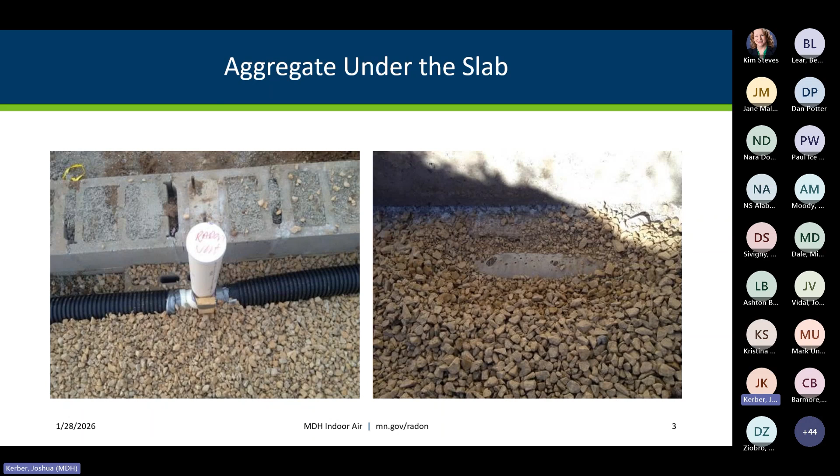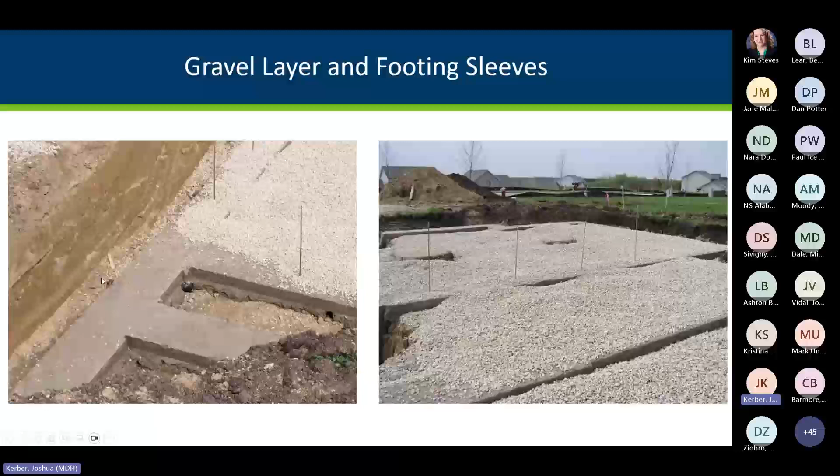You also want to make sure the air void you're creating under the slab is continuous from one foundation zone to the next. So if you're drawing air from anywhere, you make the connection from point A to point B. One way we do it here in Minnesota is with footing sleeves—4-inch perforated PVC pipe that connects this foundation zone with the next. Likewise, we have one connecting the outside foundation zone with the inside foundation zone.

On top of that clean gravel fill, we put a vent pipe and a soil gas retarder. It's probably a misnomer calling it a soil gas retarder, because there aren't really strong requirements in the standard, or field experience showing it needs to be airtight. So it's not really keeping soil gas from moving into the building. What it's doing is a much more important role: keeping the concrete slab pour above our clean gravel fill. It's really a concrete retarder if you want the nuts and bolts of it, and what it does is keep the concrete from filling our gravel bed.

That does two things for us. One, it gives us the soil gas collection plenum beneath the slab. Two, it creates drier environments because we have a capillary break—so the wet soil underneath the house doesn't have that wetness migrate through the concrete and into the house.

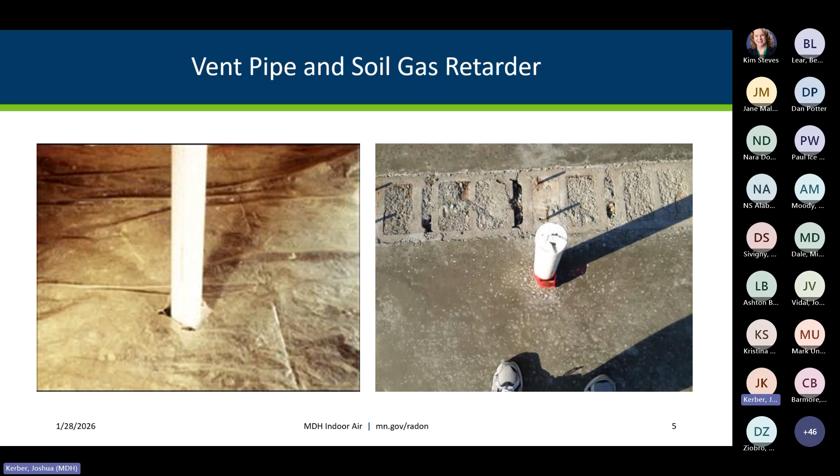Crawl space membranes do need to be sealed to the outside walls and inside piers, but we don't see a whole lot of them in Minnesota. Other states, obviously, you'd see these quite often. The reason we don't see many crawl spaces here is because we have to dig so deep to get below the frost line that we just hollow it out and call it a basement.

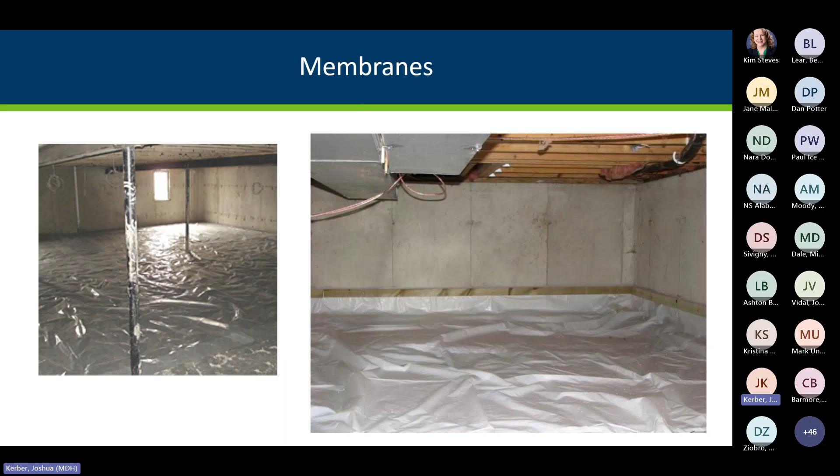Now, the most important piece to all of this, if you want a successful radon system, is to make sure the gaps and cracks are sealed. This is an example of a sealed floor-wall joint between the floor and the concrete block walls. If this joint isn't sealed in a permanent, airtight fashion, and then we finish the basement and bury this crack behind a wall, it's going to cost a heck of a lot more energy to reduce the radon in this building.

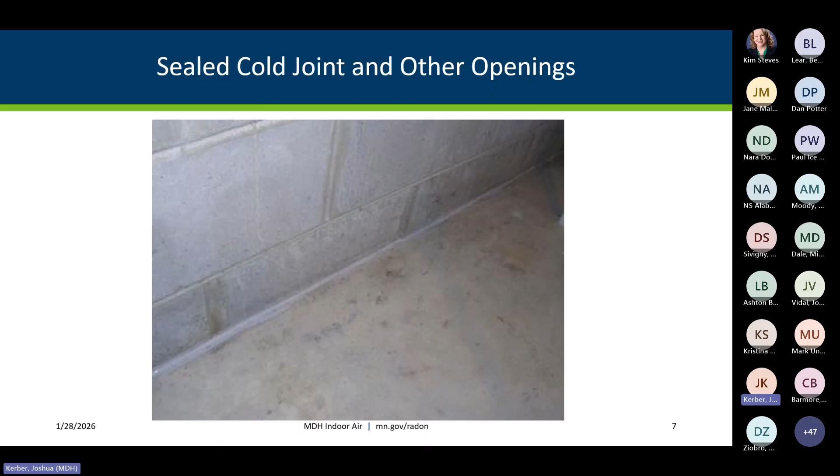So if there's one thing you take away from our presentation today, in new construction and in retrofit mitigation for that matter, the sealing is the most important piece. The floor-wall joints are most important, but other openings too, like control joints and expansion joints, all need to be sealed to make sure we keep the conditioned air in the basement.

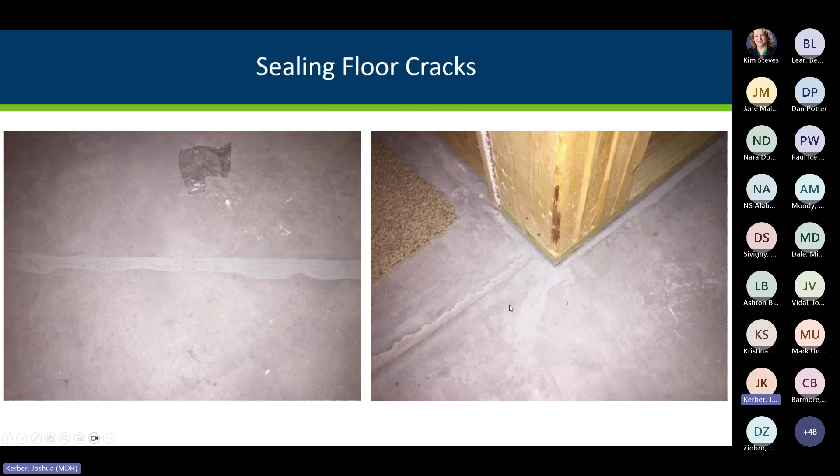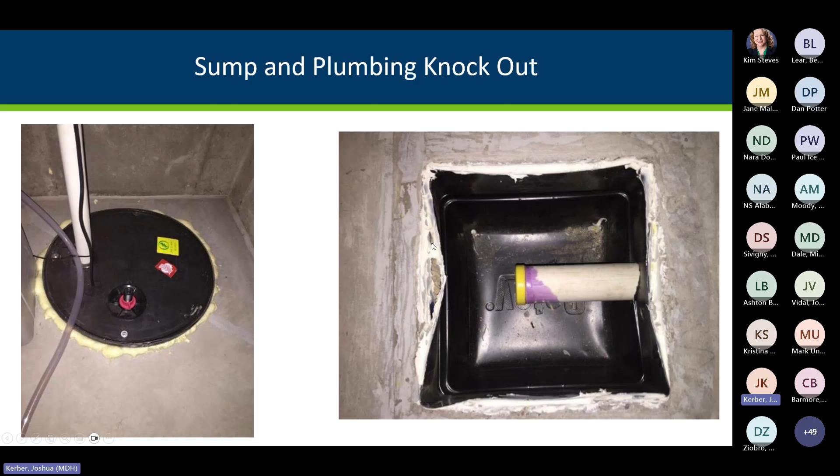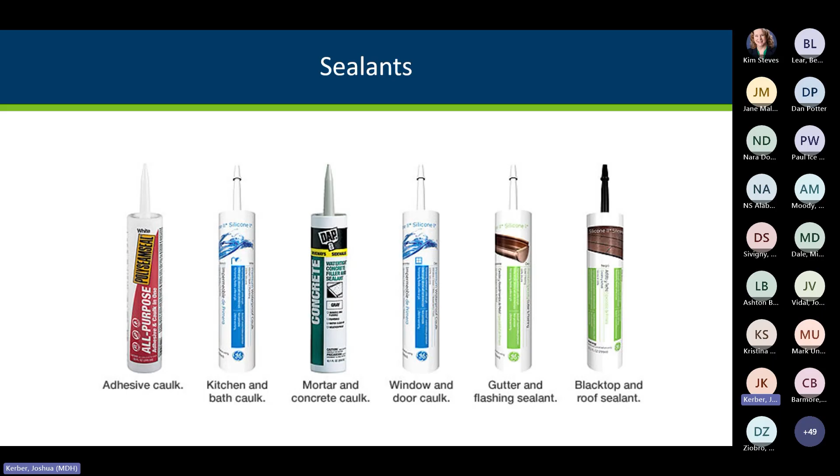Other penetrations through the slab also need to be sealed, using proper materials. This plumbing knockout already pulled away from insufficient sealing, so better materials lead to better results. You want to use sealants, not adhesives. Adhesive caulking isn't what you want. You want an actual concrete sealant that will move and flex as the two materials shift. Adhesive is meant to stick forever, not move. Sealants will move as the floor and walls crack open or shift.

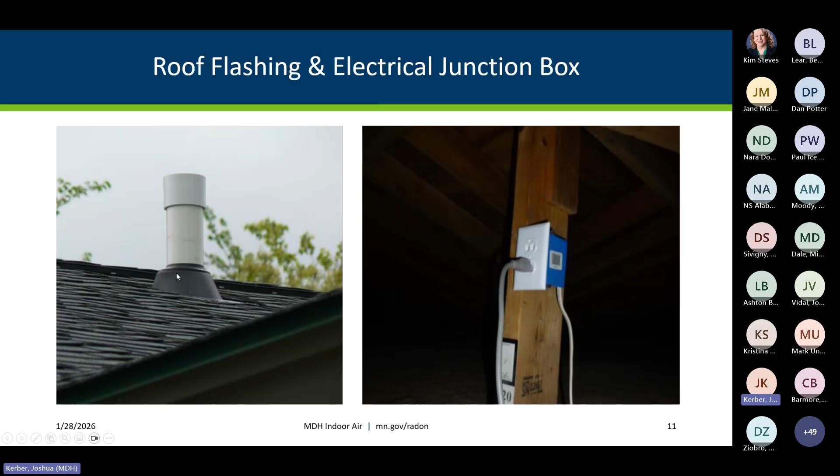Then above, we've simply got roof flashing. The pipe is flashed above the roof, and then we have the electrical in the attic.

So what's next? We simply add the fan during construction, which is probably the best way to do it, or test for radon after occupancy and then activate the system if necessary. I'm going to pause there and pass it over to our EPA colleague who has joined us.

Tommy, if you want to take it. Thank you, Josh. Sorry everyone for the technical difficulties, but here we are.

EPA estimates there are over 7 million existing homes in the U.S. that still need mitigation today. Building homes with radon-resistant features is one of the easiest, most effective ways to protect more people from radon exposure.

Recently we published a benefit cost analysis, and we estimate that new construction strategies, applied to a sample of 2 million homes over 20 years in high radon areas, can avoid an estimated 19,000 to over 48,000 excess lung cancer deaths, with a net present value between $62 billion and $131 billion. This is an estimated return.

If you want to put it per dollar, it's between $25 and $53 per dollar expended on radon reduction strategies.

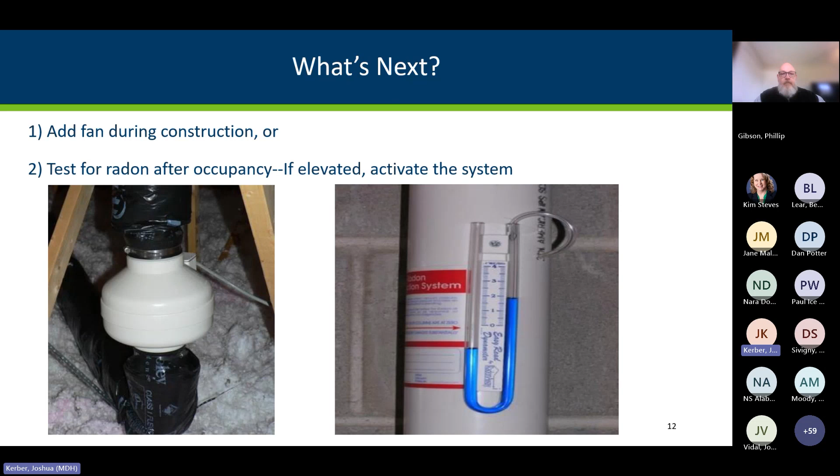One strategy we had was: why activate passive systems during construction? Everything is cheaper when done upfront at the point of construction, so you'll have much lower radon levels to begin with. You'll also address a false sense of security among occupants — when they see a passive radon system, they think they're safe, which isn't necessarily the case since we haven't tested to determine that. There's also decreased liability for builders, and it's more cost effective to install the fan upfront rather than later. The problem is the additional cost over the entire population if we activate these systems from the start.

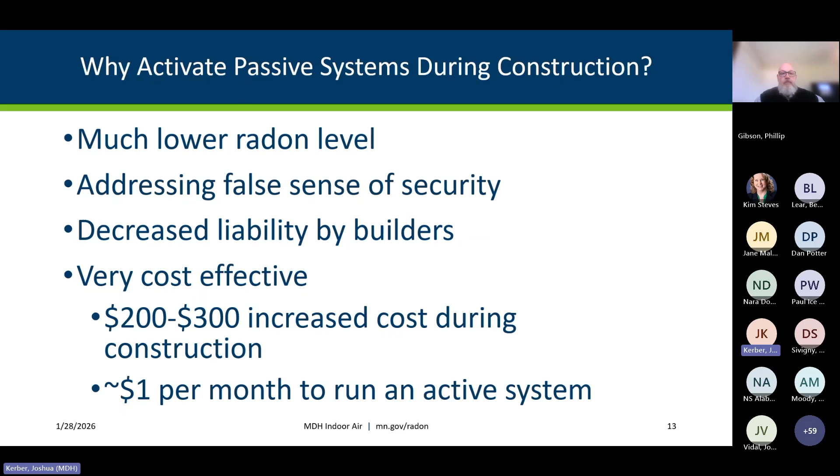In 2015, the Minnesota Department of Health conducted a radon-resistant new construction study with our new home population. We sent surveys to the 13 fastest and biggest growing counties in our state, roughly 4 to 5 years after the inception of our radon-resistant new construction building codes. We wanted to get a sense of how these systems were performing as built by a variety of different builders in different locations. We did not visit these houses upfront; we provided radon test kits for homeowners to do their own testing and gathered the results in follow-up. As of publication, we tested over 800 homes, and only about 20% were elevated. Compared to our existing data set of hundreds of thousands of homes prior to the building code, we saw about 40% of existing homes over 4. So something we've done in building code has greatly affected radon in new homes — our average radon was about 2, versus about 3 in the larger existing data set.

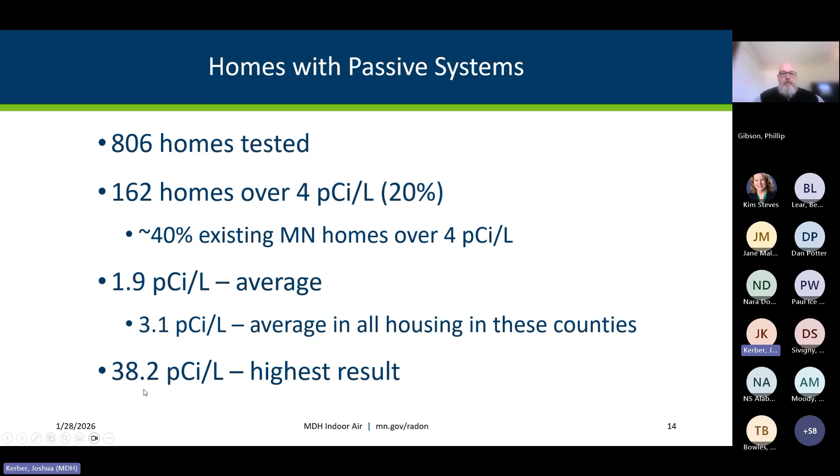But we still had elevated radon in some houses because attention wasn't paid to construction detail. Fans were added by the homeowner and then retested. The carrot and the stick here was: we'll give you a free radon test kit, and if you're one of the first 100 people who respond with elevated radon, we'll provide a free radon fan. We provided over 100 fans, and at time of publication we tested 72 activated houses — 70 came back well under 4. There were 2 homes still struggling, however. We visited those 2 homes and found that the sealing detail I mentioned earlier was ignored. Once that was taken care of, radon went down dramatically — over a 94% radon reduction in this subset. So we know that it works.

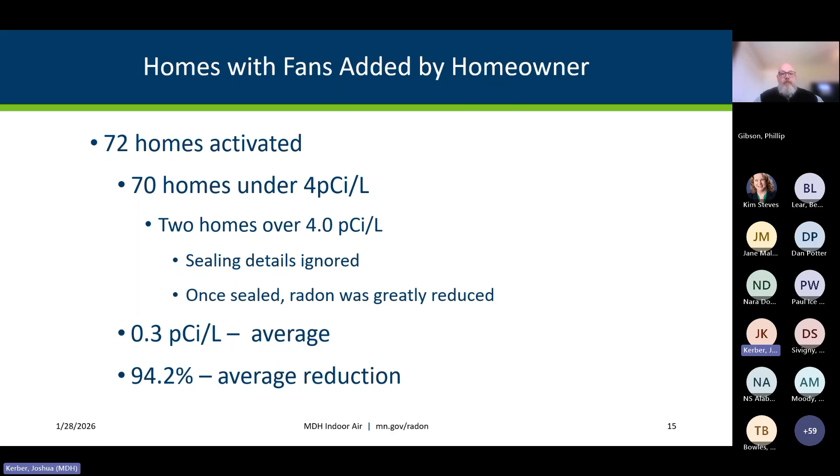So what do building code officials need to know? First, in areas looking for code adoption, we may not want code officials to take on more responsibility — let the radon professionals handle that, let the people who know radon handle it. But there are common mistakes made by builders. The overlooked detail is the sealing at cracks and joints not being done. If you can get that slab and wall sealed, that's the most important piece.

In some cases, we don't have enough room in the attic for a radon fan, because the existing PVC pipe is located too close to the edge of the roof to have space to work. So we now require in Minnesota — and we've changed the codes, which Jane will talk about — an actual working space where you can put the fan in. Other failures, not as common but they do happen, include the suction pit or T-pipe under the floor getting plugged by debris, garbage, or even concrete.

So it's not actually connected to the gas permeable layer. And finally, we have little or no radon testing being conducted. We don't have a good data set of post-testing, specifically nationally. And that's a false sense of security for the owner and the occupant.

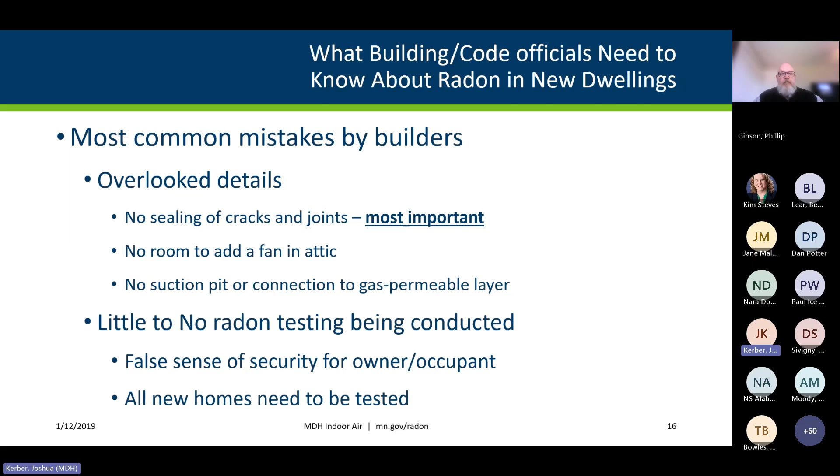So all new homes need to be tested. And we have addressed that in the national code that Jane is going to talk about now.

Perfect. Thank you. Okay, well first of all, I want to say I'm really glad to be here today to participate in this exciting launch of a new effort where government to government communication, meaning state radon program staff, will begin to, or continue rather, in an organized way, hopefully we'll see more and more contact with code officials from radon programs.

You all, state radon program folks, are, as government employees, really key ambassadors for this message, because at the end of the day, the code officials have a lot of power in this system, and are going to rely on your input, your opinions.

The family of codes managed by International Code Council are all updated every 3 years. ICC manages the committees and the hearings. The final decision on all actions on the codes is made by voting ICC members, the code officials. And I would say that the open participation and stakeholder balance in their process is limited. They don't have a full array of stakeholders participating in their committees, for example, and those are just different aspects of how they run that system, that differ from, for example, the ANSI-led standards process used for the RRNC standards.

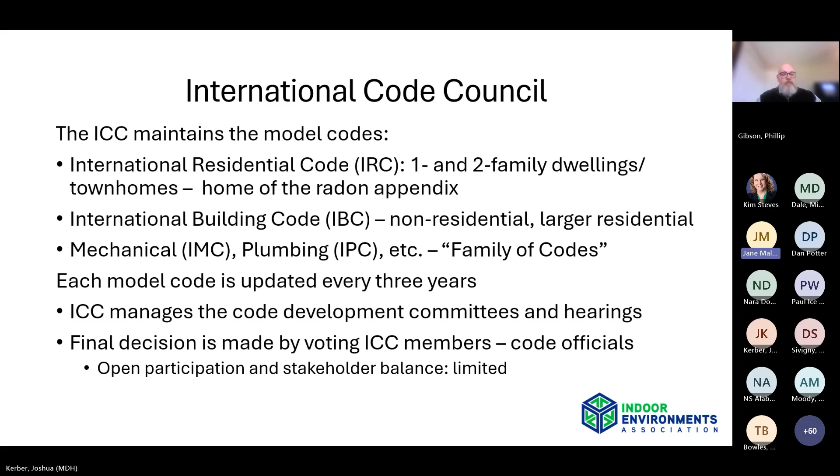With the International Code Council Appendix F, all code appendices are optional, and a proactive jurisdiction decision is needed to actually make an appendix available locally. Now, there's some exceptions to that, but generally speaking, our conversation about code adoption, the appendix adoption, is about getting a local or state agency or legislature to actually move that forward.

Appendix F is called radon control methods. And this is one thing I wanted to stress today. We in the radon community refer to RRNC, radon reducing new construction, or radon resistant new construction, RRNC. That terminology is not used in the code world. I mean, some people who are knowledgeable about radon have heard that term, but the name of the appendix is radon control methods. And so in the process of trying to educate code officials and other partners to advance adoptions, it's important to use that term, radon control methods.

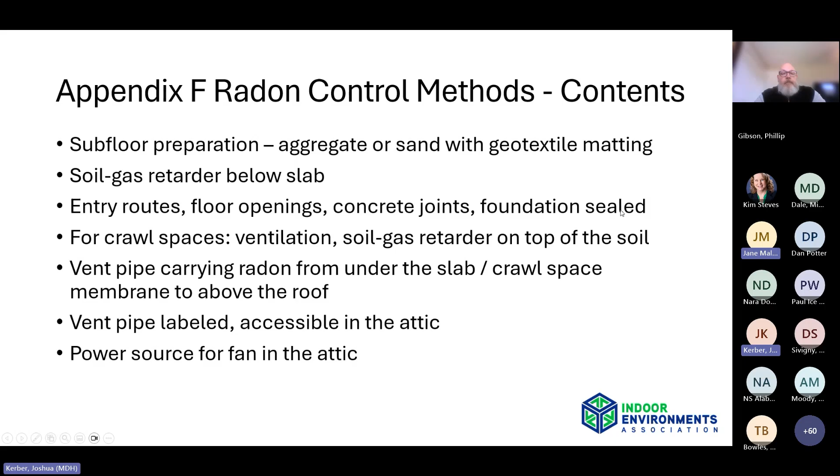And as Josh said, these protocols from standards to... you know what, I'm going to stop here, Josh. Why don't you put up my slides, and that way, because we're going to get to the maps in a minute. Thank you. I've got them up. Okay, I've got them up. I'm trying to follow you.

Okay, so the evolution of the Appendix F, you can see on the slide there. I won't read all that detail, but just to let you know that in the beginning, it was developed by code officials, EPA, and builders. It was unchanged until 2021 when the testing requirement was added.

A minor change in 2024 code allowed for an option for certain soils. There were 4 changes in 2020 that are going to take effect in the 2028 code.

First of all, to delete the radon zone map and the county list. Secondly, to allow an option to follow the ANSI RRNC standard, rather than the detailed protocol in the appendix. And also adding the cylindrical space in the attic to allow room for the fan. And finally, adding a requirement for horizontal pipe inserted on both sides of the T-fitting under the slab or in the crawl space.

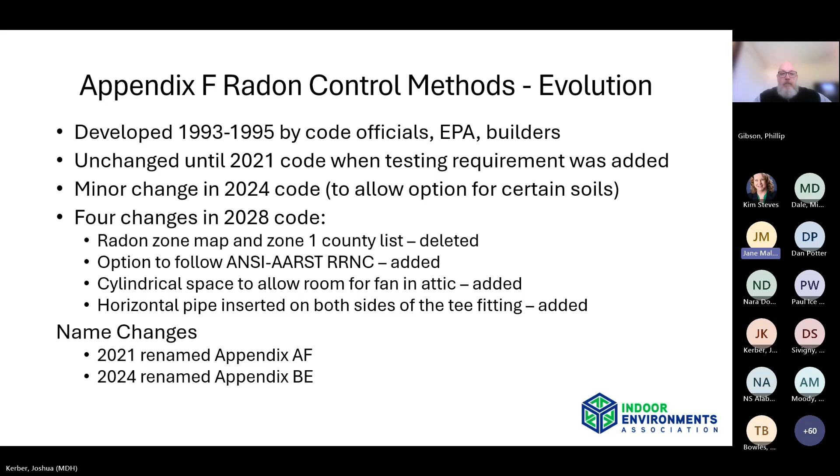In addition, the appendix has gone through name changes. They changed it to Appendix AF as of the 2021 code, and they changed it to Appendix BE in the 2024 code. So that makes the conversation a little complicated because it's not one size fits all, depending on what code is already in action in a given jurisdiction.

State legislature, there are 4 ways that states and localities can adopt. The pathway will vary. First of all, state legislature enacts model code as law. For example, 3 states created a mandate to develop the policy using a task force or another mechanism.

Another way is for the legislation to empower state level appointed bodies or councils. And this is common. A number of states have some kind of building code administration body or building code council, but it's an appointive body made up mostly of code officials and builders.

Localities are authorized to adopt codes by state legislation. Some can vary from the state version, some may only adopt the state version. They're basically having a preemption under something called the Dillon rule, which does not allow localities to have something more protective or even different from the state. In some states, localities are free to adopt without any approval whatsoever.

So then the statewide radon appendix adoption considerations: legislation may be needed, and we all know that U.S. state staff can't be involved in that directly, but you'll be invited to contribute information and opinions when appropriate. A legislative appointed body may have the power to decide, like the board or councils I mentioned. But keep in mind that state employees may influence the decision making. State staff may have the power without a board.

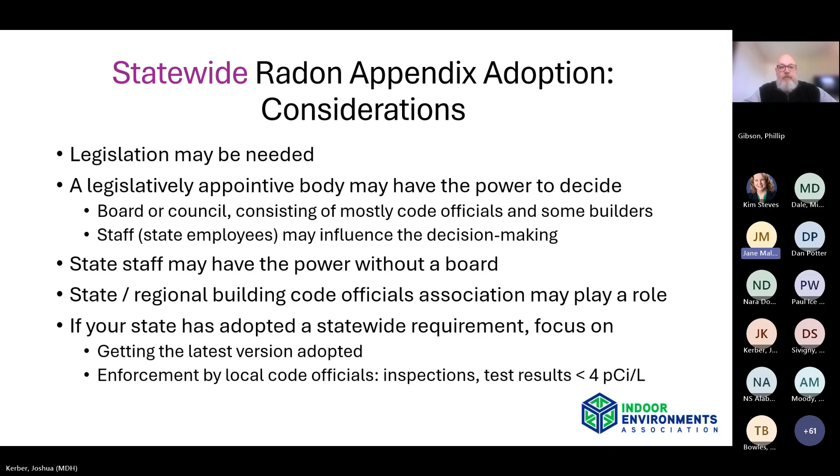The next slide is going to focus on local radon appendix adoption, but I'm going to skip over this—it's sort of the same formula. There are different things you will do at the local level. Again, the code officials are extremely influential.

What I want to focus on now is the recent changes in the appendix, because these are news for all of us and also for the code officials. Many of you know already that the 2021 code added a testing requirement, and this slide details how that works.

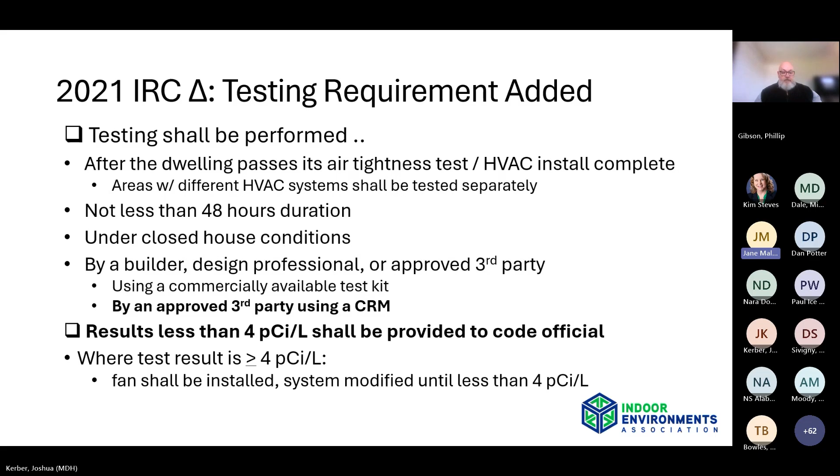The first half is about when and how testing shall be performed. The second part shows results less than 4 shall be provided to the code official. That's a very powerful tool. If the appendix is in play in a jurisdiction that has adopted 2021 or newer, having that test result less than 4 is a very powerful tool to make sure these systems are working after they're built. Of course, having an independent test is important, better than having the builder conduct the test. And if the test is above or equal to 4, then they must go back and install the fan or otherwise modify the system.

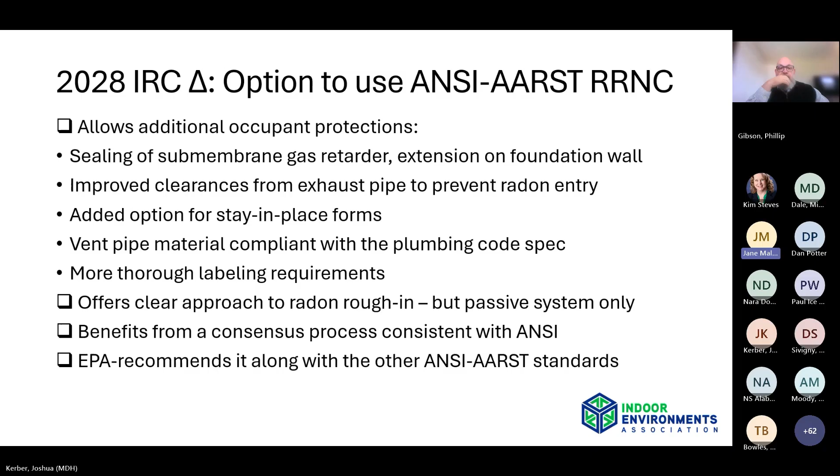Next slide: also the option to use ANSI RRNC. As Josh said, these protocols are fairly different—I mean, mostly the same, but there are a few differences. One advantage of promoting an ANSI standard to builders is you've got the benefits of it being developed through a consensus process consistent with ANSI. Also note that EPA recommends this along with the other ANSI standards. But there are some advantages.

Another change, again headed for the 2028 version of the codes, is deleting the radon map and list. This language steered code officials not to protect zones 2 and 3. EPA was the lead proponent in removing it, because an appendix should advise how to do something, not where or where not to do it. No other appendix is place-based.

Code officials are now free to adopt Appendix BE. Alternative data from CDC, available in the radon report card for each state, shows prevalence of radon test results above 4. So if you want to be advocating for this, you can.

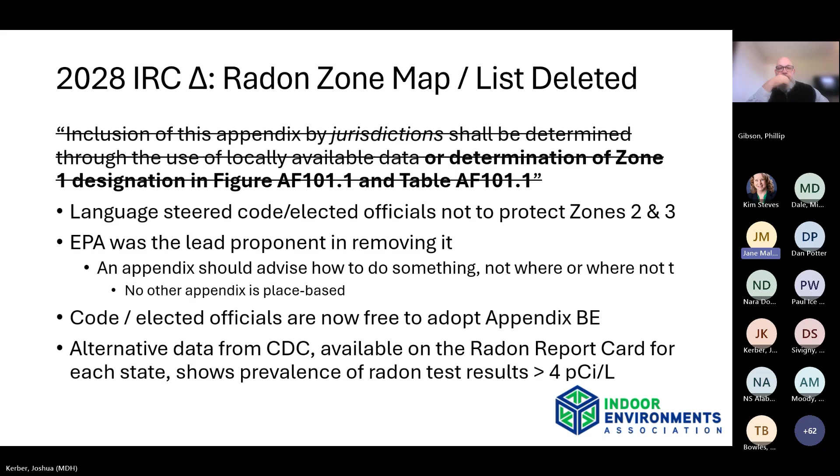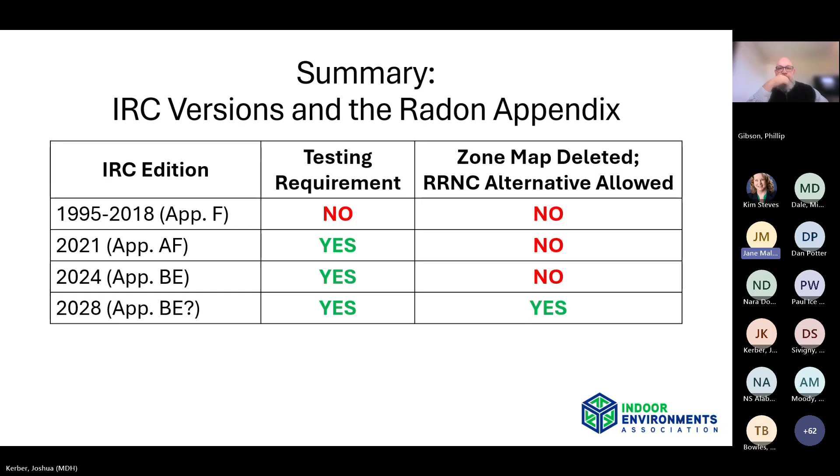The summary here shows the changes that have been made. You can see by edition in the first column, code edition of the IRC, which improvements are in play. I think this is a really important time for all of you to be looking at stepping up advocacy on the radon appendix, since these improvements have finally come to fruition.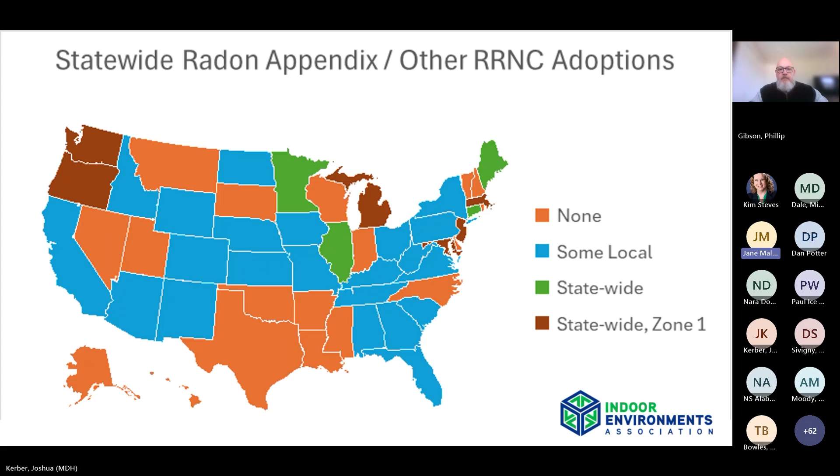I want to credit CRCPD leadership, Kim and Josh, for gathering this information. I think some others were involved too with the E25 committee to get new information on what we have in the way of adoptions. We hope those of you who look at this will check the toolkit and submit updated information about your state if we don't have the right information here.

Oh, no, right, so then this one highlights the states that have policy adoptions again, but it's highlighting those that have adopted AF or BE, because those are the states where the testing requirement is now in play. Those are the green, sorry, I've got several shades of green here. This map needs improvement, so we'll skip past that.

Thank you, and one more thing, tribal resources on codes. We don't have good collected information yet on tribal adoptions of codes, but I wanted to note that the EPA has had this resource on its website for a while, and it's a way forward for tribes looking at where they want to put building codes in play. This link and links to almost everything else you've seen in these slides are available on the toolkit that Josh is going to talk about later.

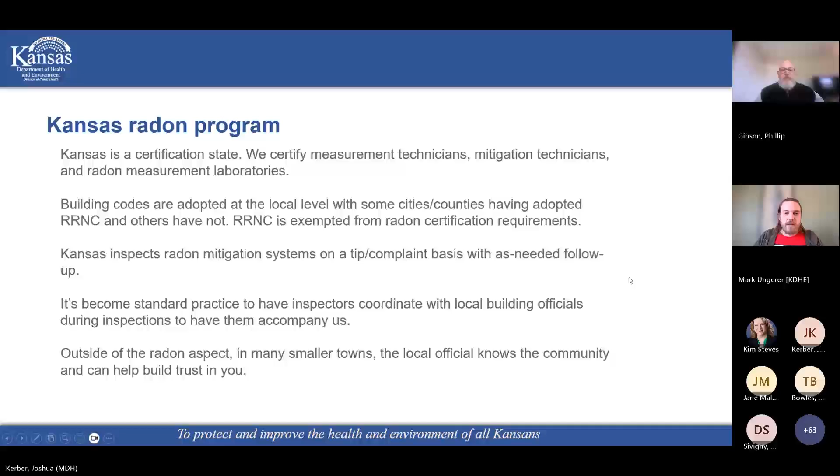One of the things, we have a lot more success where RRNC is adopted than in places it's not, unless there's a code official who has a specific interest in that, right? So we'll reach out to one or multiple contacts that we can find and tell them we're coming to do an inspection. And if they have RRNC adopted, it seems like they're more likely to come along, right? So we'll invite them and they'll actually accompany us on an inspection. So we'll go in and show them all the parts of the radon system.

And I like to do a good explanation of kind of what it is accomplishing in terms of that subslab depressurization, because building code officials, it's not like they're not intelligent, but they don't necessarily have all this knowledge about radon, right? Or what a radon mitigation system is doing. And they, like most of the general public I've found, commonly have the conception that, oh, it's just pulling radon out and discharging out. They don't understand that pressure field extension and that, the way that it's actually the depressurization that it's actually performing, right?

So just explaining those concepts and then kind of going over some of the issues that we see with passive systems, or that our builders come back or our technicians come back and say, hey, these are the issues I'm seeing, so I don't even want to touch them. And it helps a lot with education, helps a lot with them being able to kind of take that back to their group, or even builders that they know that are actively developing, and kind of liaison with them.

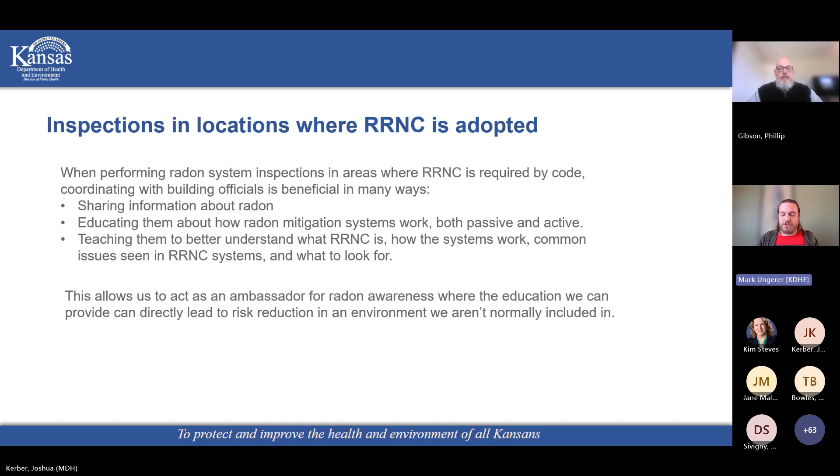And we did get a little bit of a delay in this during COVID, because while we did do some inspections, we typically were doing skeleton crew inspections, not a lot of people going in there.

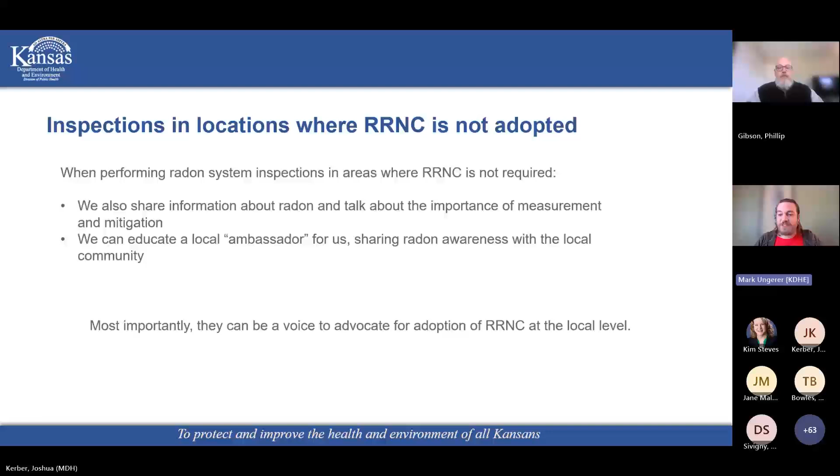So always check with your homeowners if this is something that you're going to start doing in the future. I'll have the inspection set up, and then I'll give them a call and say, hey, would you mind if I invited a local code official along, and kind of explain about RRNC. Sometimes the homeowner doesn't have any idea about building code and stuff like that as well. So it's a good idea to kind of get the permission of anyone involved. You don't want to show up with more people than they anticipated, or some sort of regulatory voice that is now in their home that they weren't expecting.

So those are some of the, I guess, best practices there. But I do recommend trying to find those code officials, even if you're not going to invite them out. If you know that they might be interested in going on an inspection, or even just educating them on what radon reduction systems typically are trying to achieve, or how they're trying to achieve it, I think that can go a long way into just helping with the success of the passive systems.

Are we holding for questions till the end here? I'm sorry. Yeah, we'll take them in the chat too. Okay, as well.

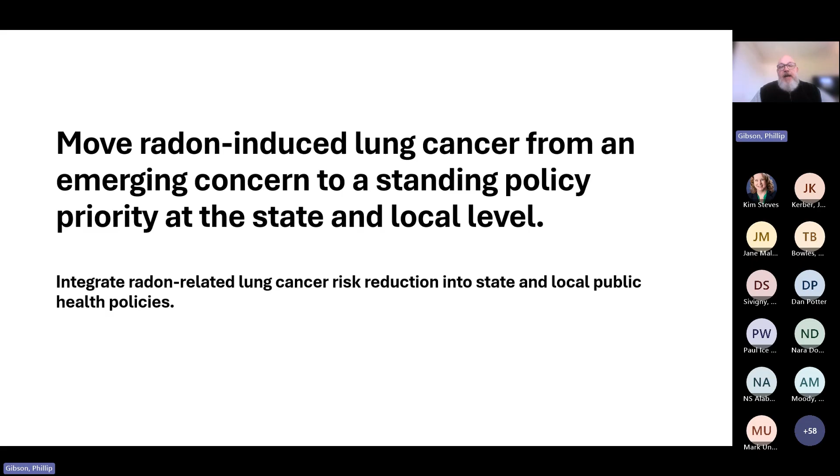So our goal then was to include radon mitigation standards, AARST, ANSI standards, into the North Carolina building codes, not to require mitigation to be conducted, but to guide mitigation systems as they were being installed.

Over the past 10 years, we've seen some meaningful success in terms of getting radon included into state policies. For example, the North Carolina Cancer Control Plan and the State Health Improvement Plan have included radon in the policies of the state.

In addition, the North Carolina Real Estate Commission recognizes, currently and since 2017, that a radon level of 4 picocuries per liter or more is a material fact. This means licensed real estate brokers can face disciplinary action for failing to disclose radon levels at or above that threshold. Testing is voluntary, not a requirement, but if a test has been conducted and the radon level is known to be elevated, everyone involved in a real estate transaction needs to be informed of that high level.

When it comes to building codes, it's important to understand that North Carolina is a Dillon's rule state, as Jane went over a moment ago, and is not regarded as a home rule state. This means local governments in North Carolina can only create building codes or ordinances when the North Carolina General Assembly allows it. The General Assembly does grant authority to the North Carolina Building Code Council to establish building codes, so our efforts were focused on requesting action from that council.

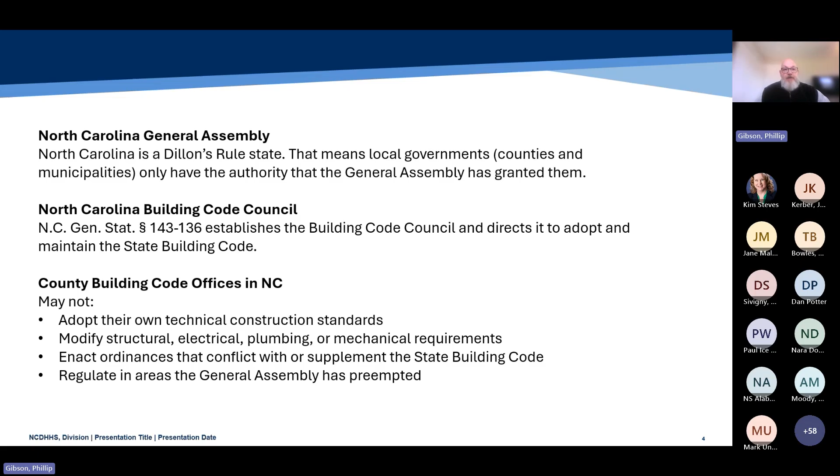Our overall approach has been and continues to be a long-term strategy — I'm playing the long game, if you will. This effort started 10 years ago with getting radon formally included in the Cancer Control Plan, as well as other policies. From there, we built partnerships, programs, and resources that involved those partners in the total process.

The Cancer Control Plan Advisory Committee includes a legislative subcommittee, and through that group we requested letters of support for including radon mitigation standards in the building code. Our request was for voluntary guidance — we wanted standards in the building codes so that, should a builder voluntarily decide to install a mitigation system in a home, there would be guidance in state policies for what that should contain. The guidance specifically referenced the ANSI standards. This was not a requirement to install mitigation systems.

So we made a formal request. This was an in-person presentation to the Building Code Council, and that request was denied.

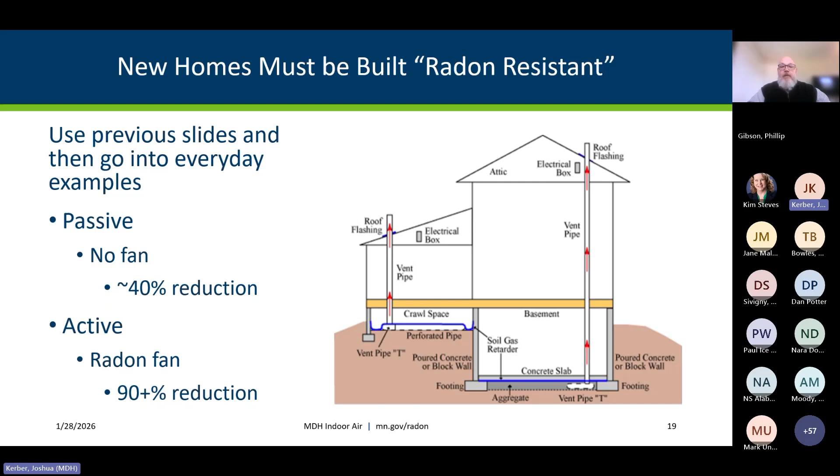These training materials are available to you folks as well, and they can be tailored. Everything I talked about earlier, we discuss at length, and then we actually bring them through a case study.

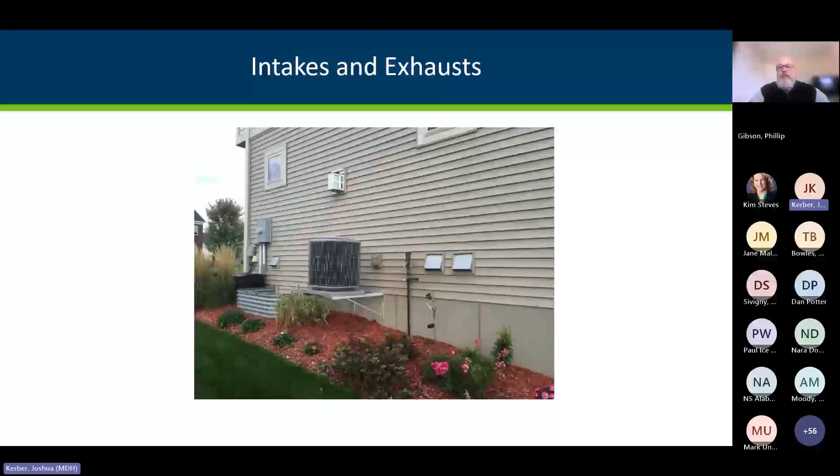This is a new modern-built home, built with radon-resistant features under the new energy code. We talk about the building science and the aspects of what you're actually inspecting—like, as a code official, do you understand there are intakes and exhausts and the importance of them working properly?

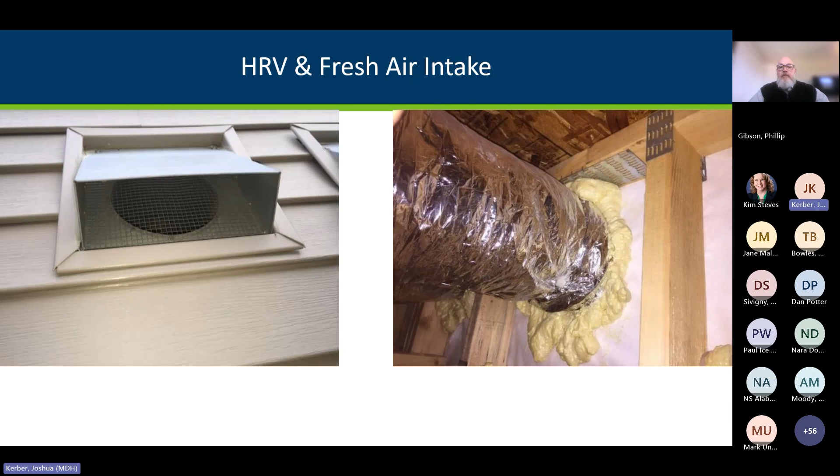On the left here you have a heat recovery ventilator, or an air-to-air exchanger. This is a very clean air intake, and they need to be clean. If they're not, that causes a problem with pressurization and depressurization, more specifically in the lower levels of the house.

We make sure we talk about fresh combustion air, whether or not the home needs it. As for combustion appliances, it does need it to breathe because these buildings run negative—another way to put that is these houses suck.

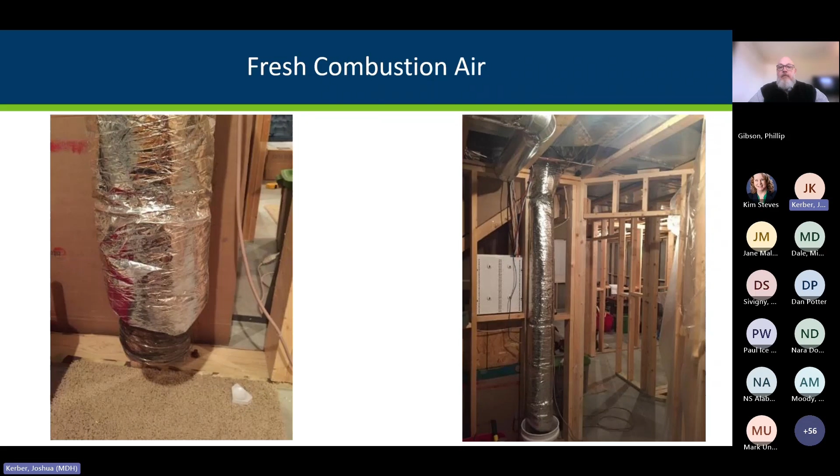You have an air exchanger, but what the heck is it? What does it do? Do the occupants know how to operate it, and more importantly, how to maintain it?

If you don't maintain these air-to-air exchangers, regardless of what climate you're in or where you're located, they will cause radon problems because they'll cause the building to suck in more air than they blow out. On the right-hand picture, which I'll zoom in on in a couple slides, this is the maintenance schedule for this appliance.

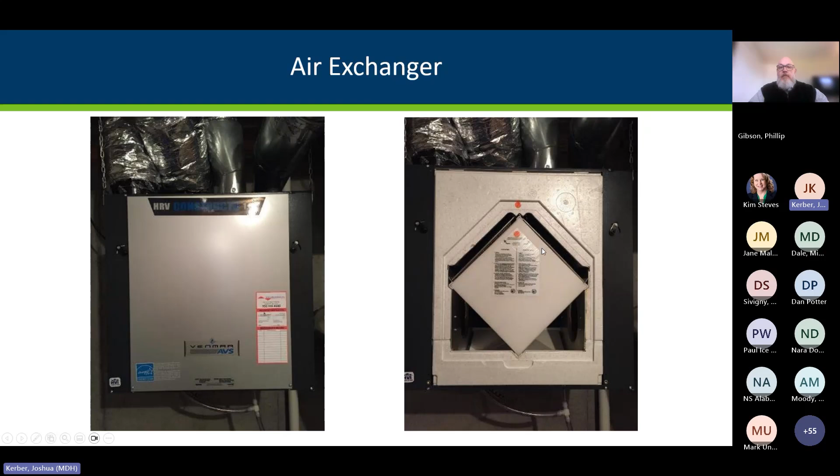It's rarely followed. It says these filters need to be cleaned or changed quarterly. Many of them, when we see inspections, haven't been changed at all in years.

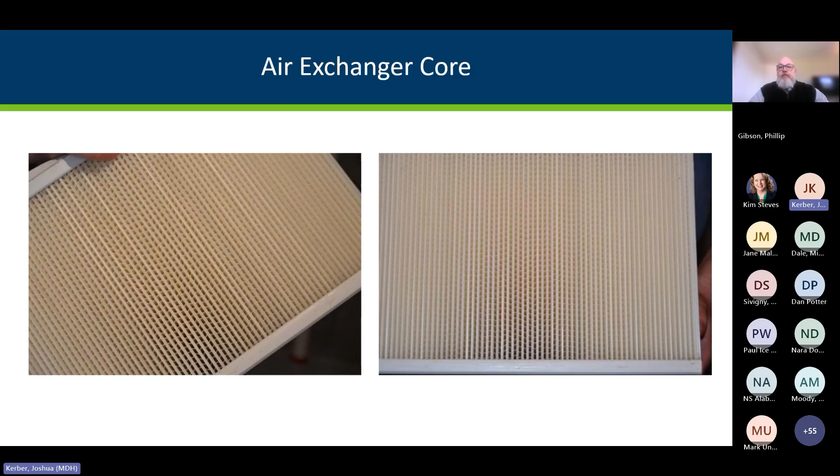There's a core, an energy-related transfer core. It doesn't mix the air in that box, but allows the energy—the heat and cooled air—to temper each other. This core needs to be cleaned at least annually, sometimes twice a year depending on the manufacturer. It's rarely done. Here's the maintenance schedule.

Change your filters quarterly, address the core annually, and clean the intake on the side of the building, which is probably the most important part of the entire air-to-air exchanger system. It says 'clean as necessary'—well, what is that? How are they going to know?

So making homeowners aware that they have to maintain this thing is of utmost importance. What I tell people in my training is: anytime you have to shovel your snow or mow your lawn, go double-check that your air intakes are clean.

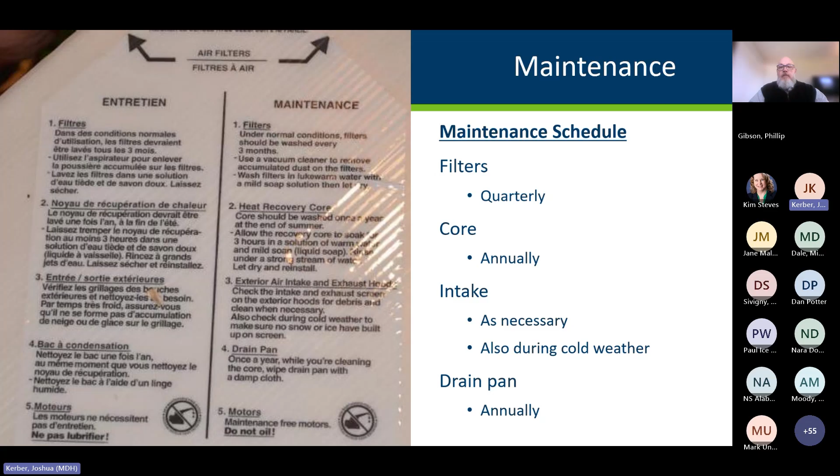A couple other things—the effects of an air exchanger. Does it affect radon levels?

Maybe sometimes, and it depends. If it's balanced or positively pressurized, you'll get a slight amount of dilution. But if it's unbalanced and unmaintained, it actually sends the basement into a harder suction scenario, and that can cause a radon problem in the building.

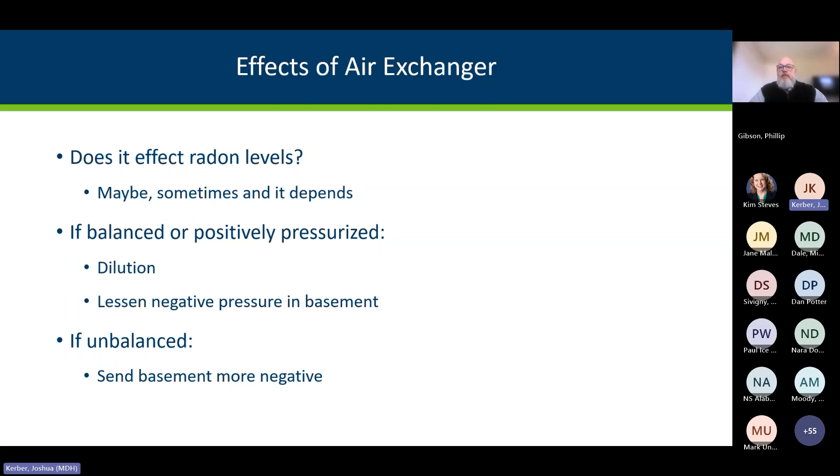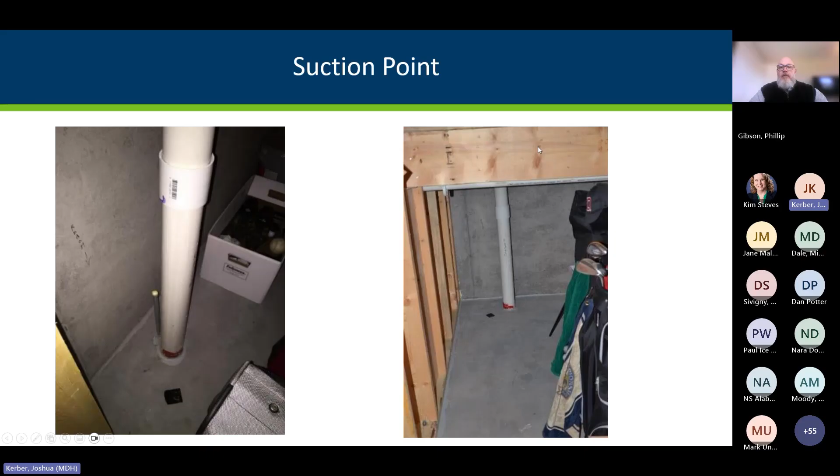So we go through an actual house or two. Is radon resistant new construction working here? Well, we want this magic number to be below 4, ideally below 1. It's well above 4 a lot of the time, so in this case, we activate it. We make sure the suction point is sealed and the gaps and cracks everywhere are sealed. We understand that there are other appliances in the home that compete with our radon system, to make sure it's more effective.

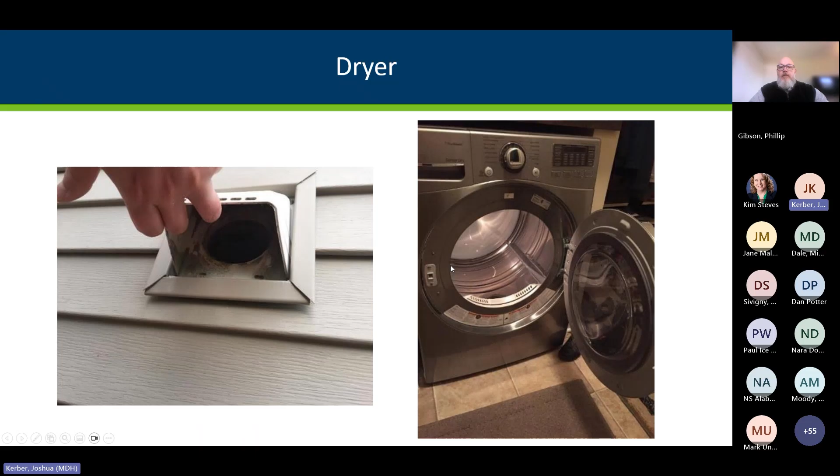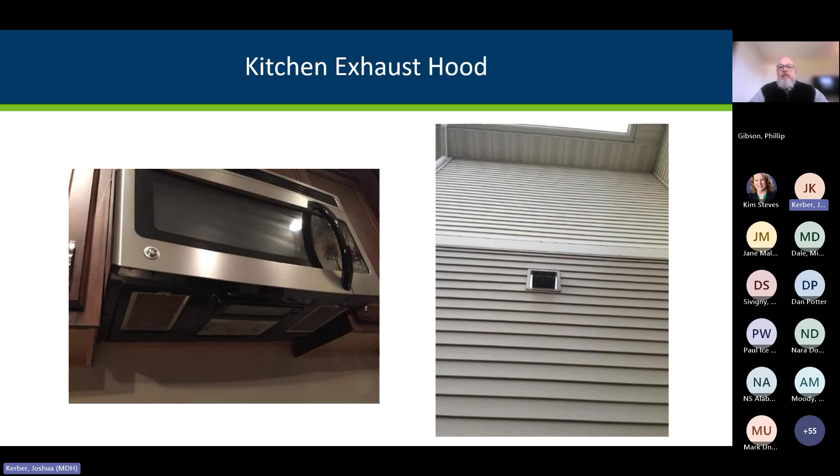We have to overcome the use of the dryer, because that uses indoor air for combustion and exhausts it outside. Bath fans and kitchen exhaust hoods do the same thing—they're taking indoor air and blowing it outside. Where's that makeup air coming from? It's coming from uncontrolled openings in the building shell, but also sometimes from the soil, and that's where we get radon problems.

Even the best sealed basements can still have radon problems. Here's an example: this was a weekend over Thanksgiving where they're cooking and bathing a lot. In this situation they had guests, so you're running exhaust fans more often for showers and bath use, and the kitchen exhaust hood is going crazy. This was a perfectly sealed basement until Thanksgiving happened and the radon levels started to tick up.

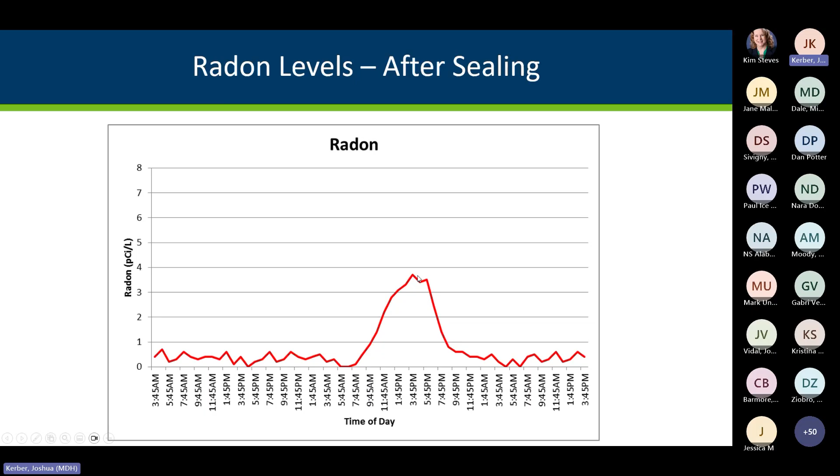So in this case, the system was activated with the fan and the U-tube manometer, and the post-mitigation levels became low again. So that's just an abbreviated piece of one case study that we go through.

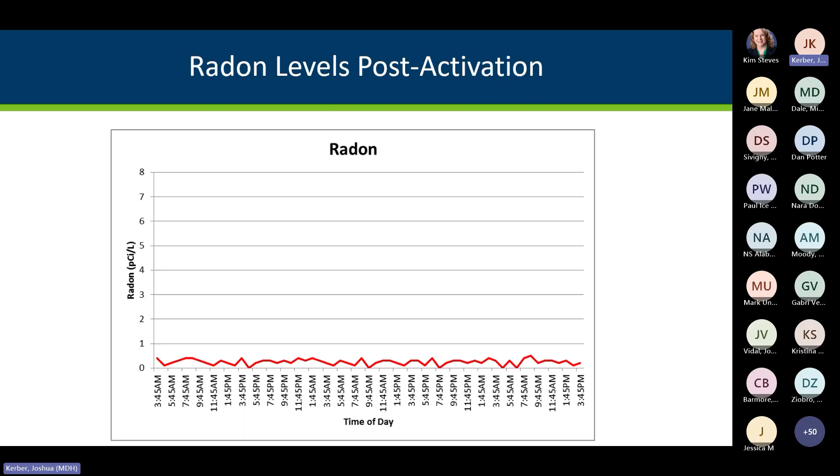And I'm now going to turn it over to my colleague, Don Sivigny at the Minnesota Department of Labor and Industry, to discuss a code official's perspective on things. Don?

Good afternoon, everybody. Thanks for having me. I'm Don Sivigny. I work with the Minnesota Department of Labor and Industry. I've been here 26 years. I started out as the state's energy specialist, talking about sealing up buildings and air quality in buildings, and we have an adage that says build them tight and ventilate them right.

That happens a lot, and Josh just covered a lot of that with the fact that radon systems—ventilation systems—can create additional suction on basements if they're not maintained.

I've done hundreds of hours of training to builders, code officials, homeowners at the community college level who take classes, and I tell them about maintenance. But as a builder myself, I used to wait two weeks before I would go meet with the homeowner and show them how their building works, because the walkthrough day of closing is a very poor time to do that.

They're thinking about whether they have enough money to cover the extras. Did the points change? Did the interest change? They don't listen to what you tell them. Making an appointment two weeks later is a really good way to show them instead.

I'm the guy they send out to take these buildings apart when they have moisture problems, and I've opened up buildings and mechanical systems, heat recovery ventilators, energy recovery ventilators, and they swore they've changed the filters, but the directions are still leaning against the filter on the inside.

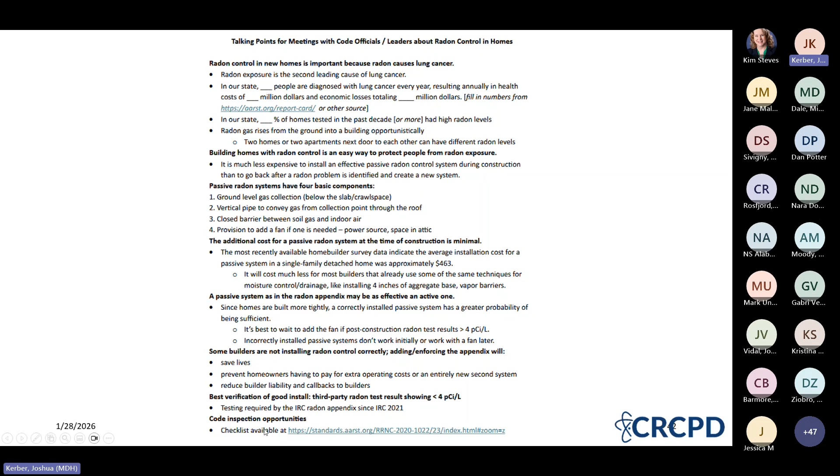So make a plan to reach out to your code officials in your state or in your tribal jurisdiction and alert them how to make radon control in new homes more effective. There are really 5 pieces to this.

Adopting the appendix if it's not already adopted. Requiring a post-construction radon test that's below 4. And we're stepping away from the zone 1 only approach, where we're only going to try this in local jurisdictions that have a zone 1 affiliation with EPA. That approach is going away, thankfully.

And allowing the RRNC standard from the Standards Consortium as an alternative pathway to get to the risk reduction we're looking for, and use a checklist to inspect systems during construction. Please let us know at E-25, CRCPD, and IEA how it goes and other ways we can help.

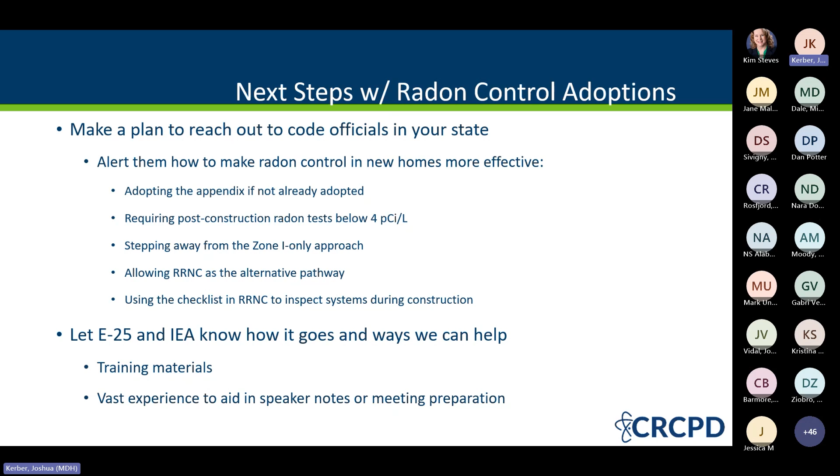We've got training materials - Don alluded to it, Jane alluded to it, I have some as well. We have a ton of experience that you can pull from to aid anything from creating your speaker notes to meeting notes or even meeting preparation, depending upon who you're going to be talking to. If that's lobbyists, a builder, a code official, whoever it is, we can put information in front of you that could be very, very useful.